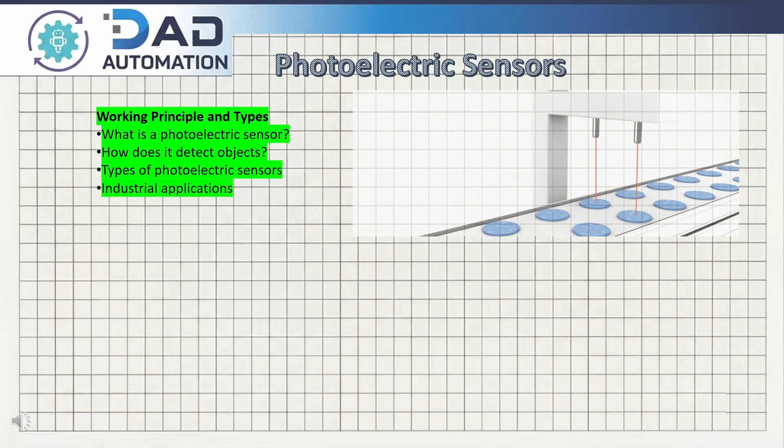Photoelectric sensors are widely used in factories to detect objects without physical contact, making them fast, reliable, and suitable for modern automation systems.

A photoelectric sensor is an electronic device that detects objects using a beam of light. Unlike mechanical switches, the sensor does not need physical contact with the object. This makes it faster, more reliable, and suitable for high-speed industrial applications.

A photoelectric sensor mainly consists of three parts. First, the emitter generates a light beam, usually infrared or visible red light.

Second, the receiver detects the light coming from the emitter. Third, the output circuit changes the electrical output when an object interrupts or reflects the light beam.

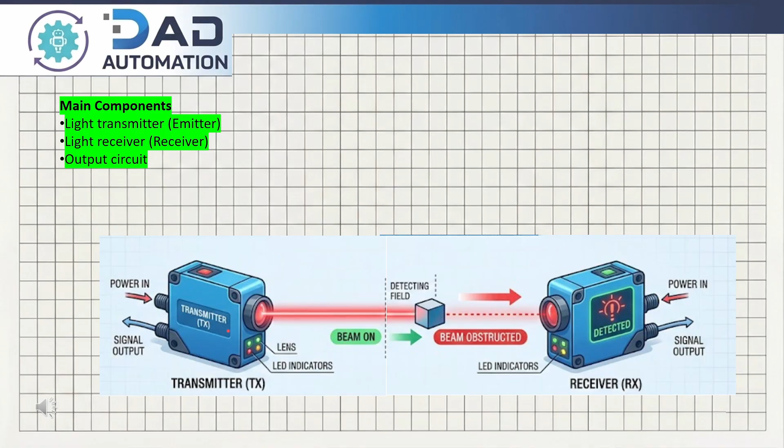These sensors are widely used in conveyor systems, packaging machines, counting systems, and automated production lines. Photoelectric sensors offer several important advantages that make them widely used in modern industrial automation systems.

The first feature is non-contact detection. The sensor can detect an object without physically touching it. This reduces mechanical wear and increases the lifetime of the system. It also allows the sensor to detect delicate, hot, or fast-moving objects safely and accurately.

The second feature is fast response time. Photoelectric sensors can detect objects within milliseconds. This makes them ideal for high-speed conveyor systems, packaging machines, bottling plants, and automated production lines where quick detection is very important.

Another major advantage is long-distance detection. Depending on the sensor type, objects can be detected from a few millimeters up to several meters away. This allows flexible installation in large industrial machines and conveyor systems.

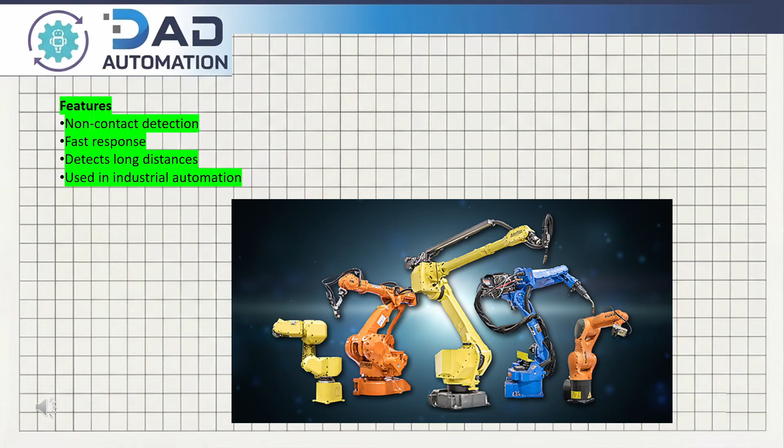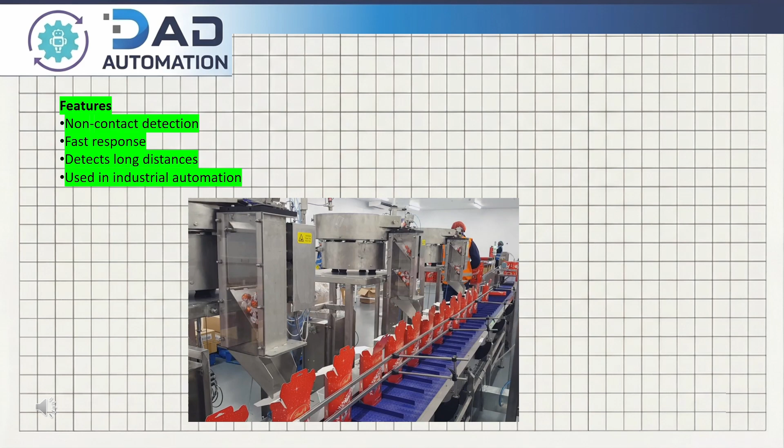Photoelectric sensors are also widely used in industrial automation. They are commonly used for object counting, position detection, sorting systems, material handling, robotic systems, and safety monitoring applications.

Because of their high speed, reliability, and non-contact operation, photoelectric sensors are one of the most commonly used sensors in factories and automated machines today.

Photoelectric sensors are mainly divided into three different types based on how the light beam travels between the emitter, receiver, and the target object. The first type is the through-beam sensor.

In a through-beam photoelectric sensor, the emitter and receiver are placed separately facing each other. The emitter continuously sends a light beam directly to the receiver. When an object passes between them, the light beam is interrupted.

As soon as the receiver no longer detects the light, the sensor changes its output signal. This type provides the longest sensing distance and very reliable detection because the receiver gets a strong direct beam from the emitter. Through-beam sensors are commonly used in conveyor systems, object counting, and industrial automation applications.

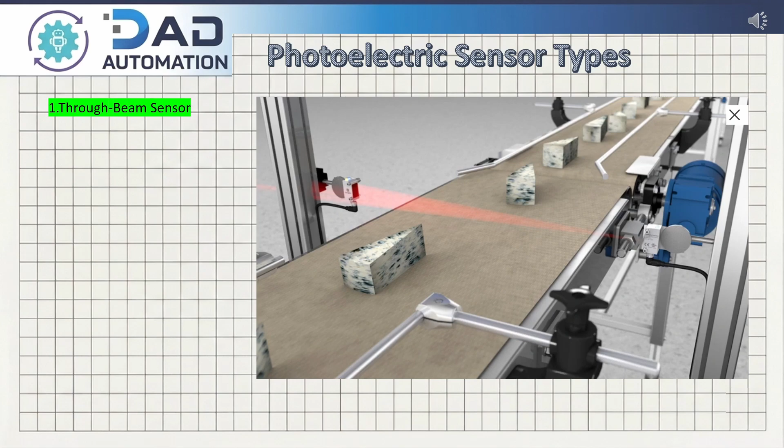The second type is the retroreflective sensor. In a retroreflective photoelectric sensor, the emitter and receiver are built into the same sensor housing. A reflector is placed opposite the sensor. The emitter sends a light beam toward the reflector, and the reflector sends the light back to the receiver.

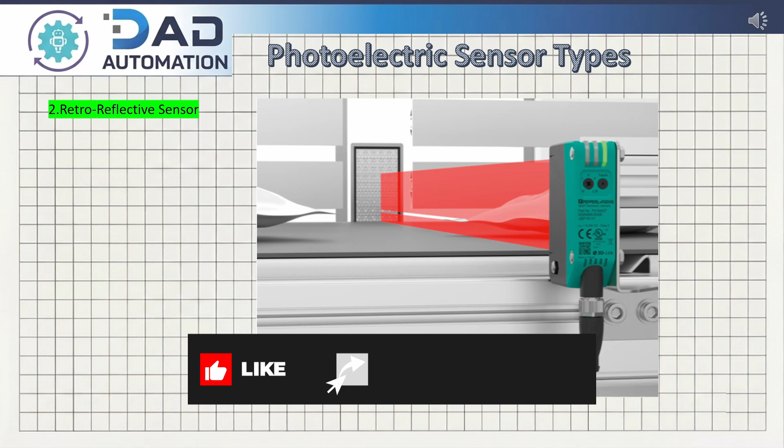When an object blocks the light path, the reflected beam cannot return to the receiver. The sensor then changes its output state. Retroreflective sensors are easier to install because only one sensor unit needs wiring. They are widely used in packaging systems, bottle detection, and conveyor applications.

The third type is the diffuse reflective sensor. In a diffuse reflective photoelectric sensor, both the emitter and receiver are inside the same sensor body. The emitter sends light toward the target object. When the object enters the sensing area, the light reflects directly from the object's surface back to the receiver.

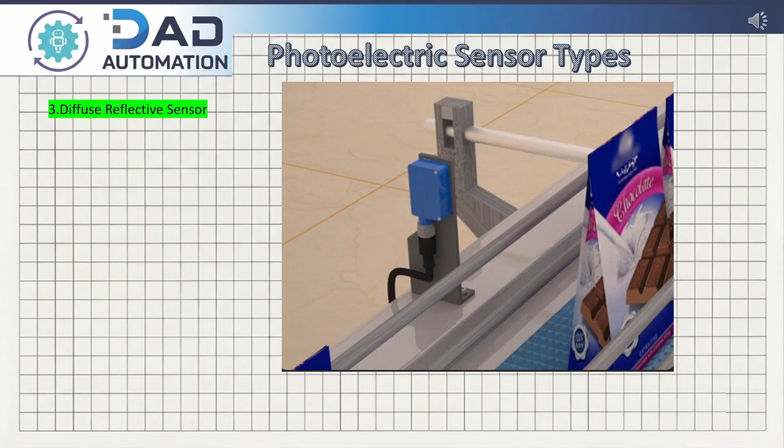The sensor detects this reflected light and changes its output signal. This type does not require a separate reflector or receiver, making installation simple and compact.

However, the sensing distance is shorter because detection depends on how much light is reflected from the object surface. Diffuse reflective sensors are commonly used for presence detection and short-distance industrial applications.

In this video, we will explore how each sensor works step by step and where they are commonly used in industrial automation.

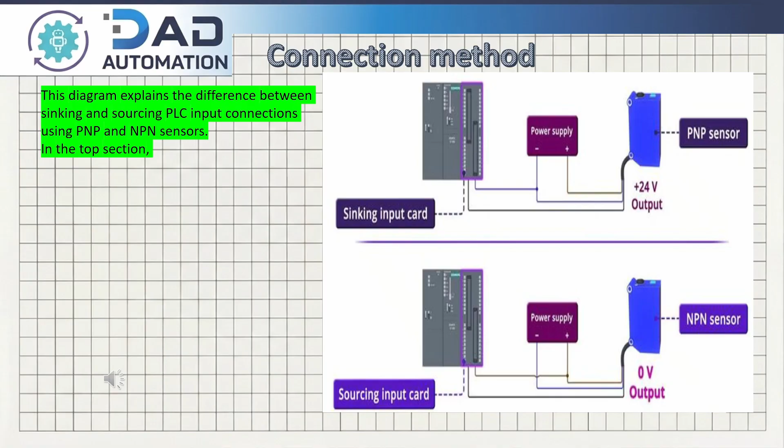This diagram explains the difference between sinking and sourcing PLC input connections using PNP and NPN sensors. In the top section, a sinking input card is connected to a PNP sensor. The PNP sensor provides a positive 24-volt output when activated.

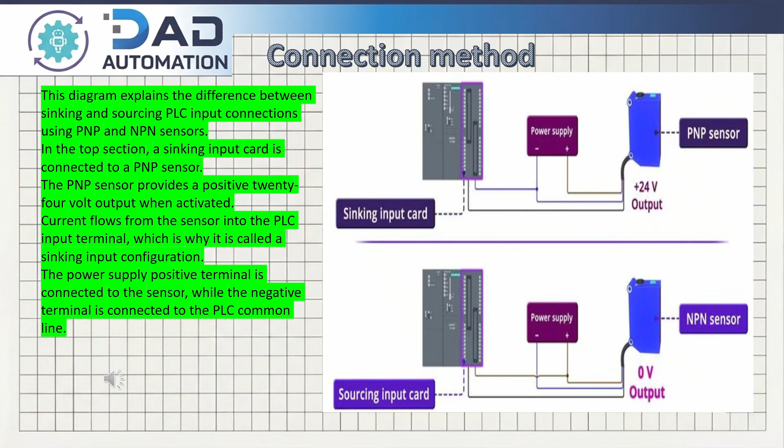Current flows from the sensor into the PLC input terminal, which is why it is called a sinking input configuration. The power supply positive terminal is connected to the sensor, while the negative terminal is connected to the PLC common line. This setup is commonly used in industrial automation systems because PNP sensors are widely preferred for safety and compatibility.

In the bottom section, a sourcing input card is connected to an NPN sensor. The NPN sensor provides a 0-volt output when activated. In this case, the PLC input card supplies the positive voltage, and the sensor creates the path to ground.

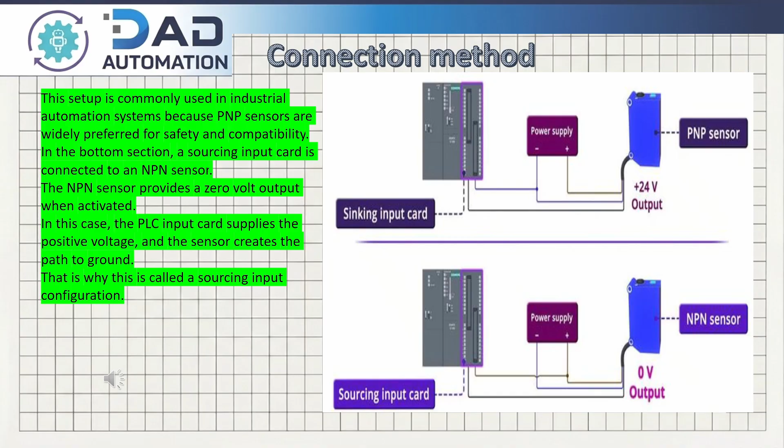That is why this is called a sourcing input configuration. To summarize, PNP sensors work with sinking PLC inputs, and NPN sensors work with sourcing PLC inputs. Understanding these connections is important for correct PLC wiring and reliable sensor operation in automation systems.

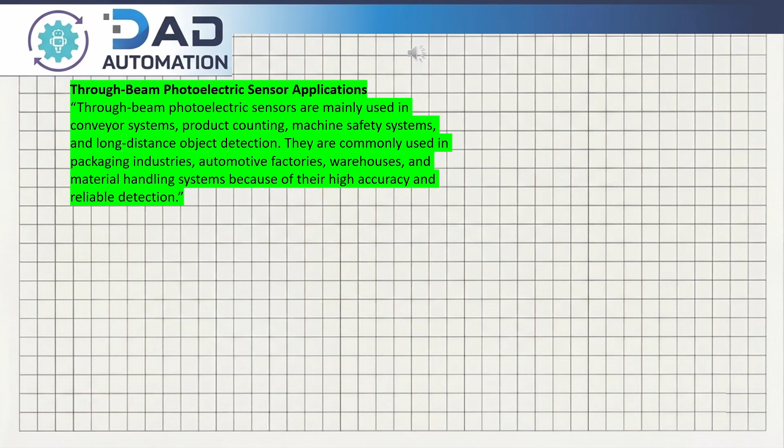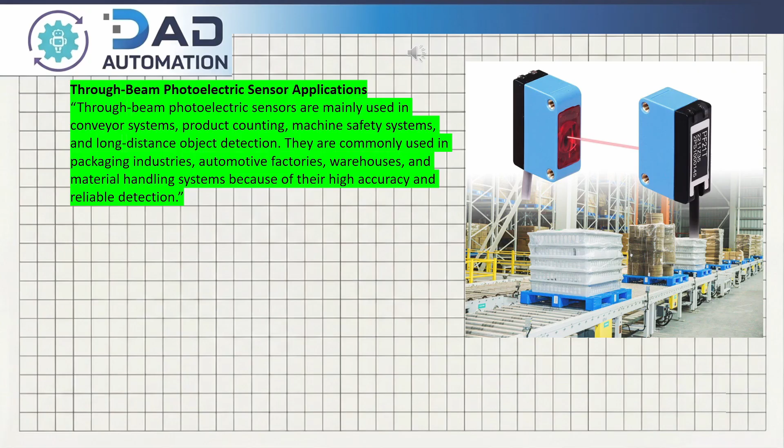Through-beam photoelectric sensor applications. Through-beam photoelectric sensors are mainly used in conveyor systems, product counting, machine safety systems, and long-distance object detection. They are commonly used in packaging industries, automotive factories, warehouses, and material handling systems because of their high accuracy and reliable detection.

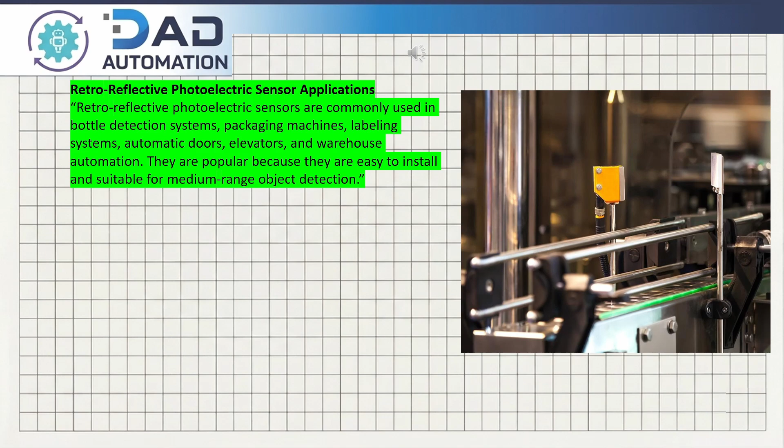Retroreflective photoelectric sensor applications. Retroreflective photoelectric sensors are commonly used in bottle detection systems, packaging machines, labeling systems, automatic doors, elevators, and warehouse automation. They are popular because they are easy to install and suitable for medium-range object detection.

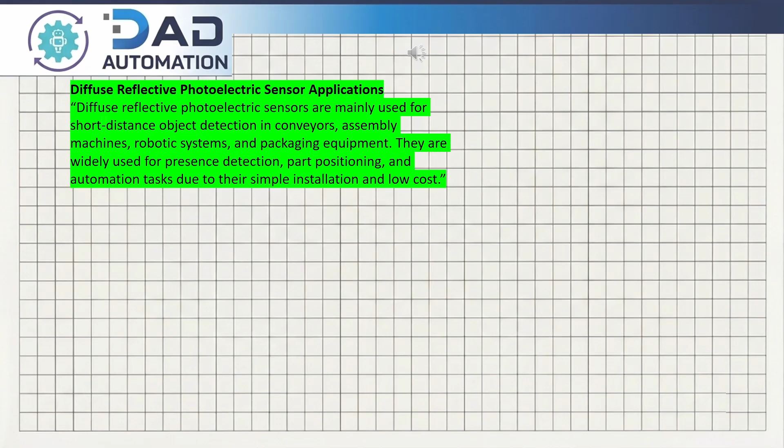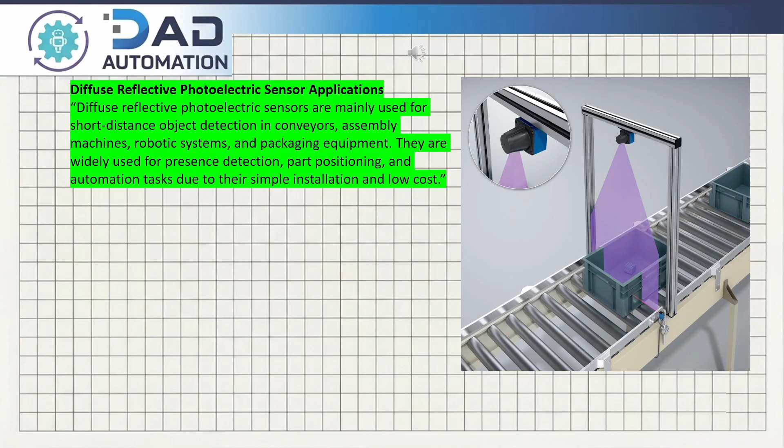Diffuse reflective photoelectric sensor applications. Diffuse reflective photoelectric sensors are mainly used for short-distance object detection in conveyors, assembly machines, robotic systems, and packaging equipment. They are widely used for presence detection, part positioning, and automation tasks due to their simple installation and low cost.